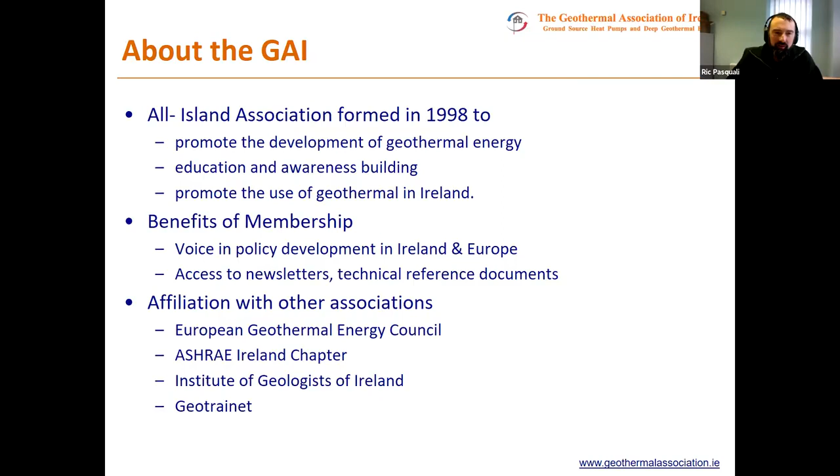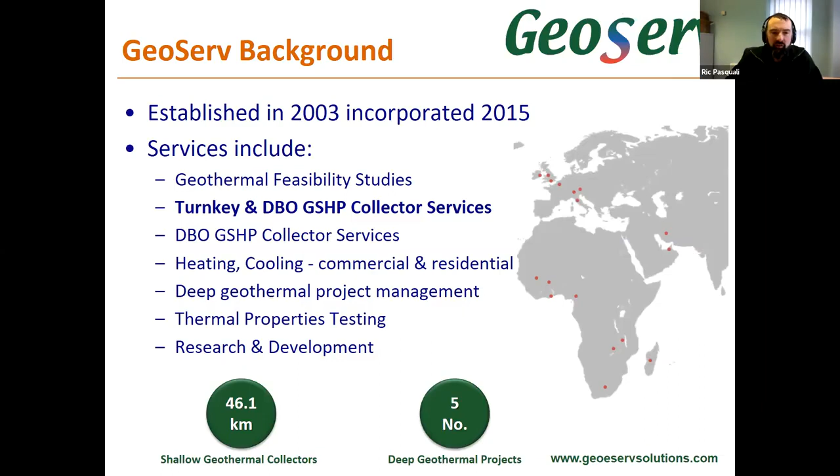A little bit about myself - my own business is GeoServ. We specialize in geothermal consultancy, particularly in offering turnkey design, build and operate solutions for geothermal collectors, for ground source heat pumps, and anything that's residential or commercial. If there's any type of system you see in the talk today that's of interest, please don't hesitate to get in touch.

So where is geothermal in Ireland at the moment? Our official recorded installed capacity that we know of in total is about 191 megawatts thermal, and it all comes from ground source heat pumps. As you've heard today, there's been historical exploration and research of geothermal resources dating back from the 1970s, but to date we have pretty much no direct utilization for heat, industrial process or power.

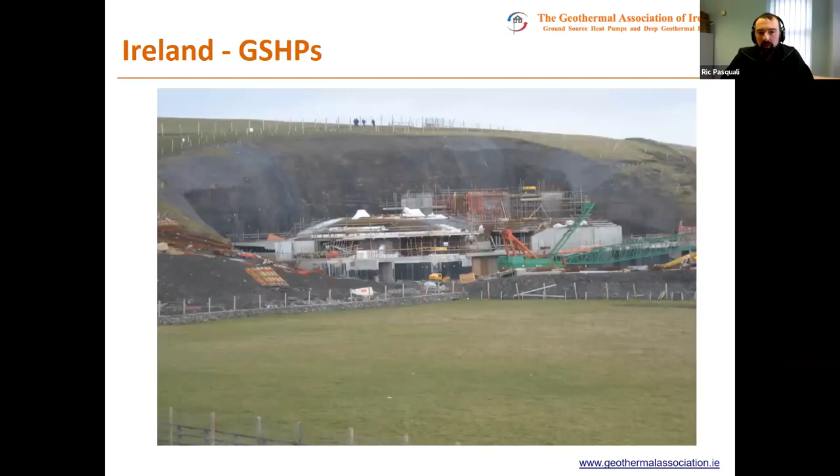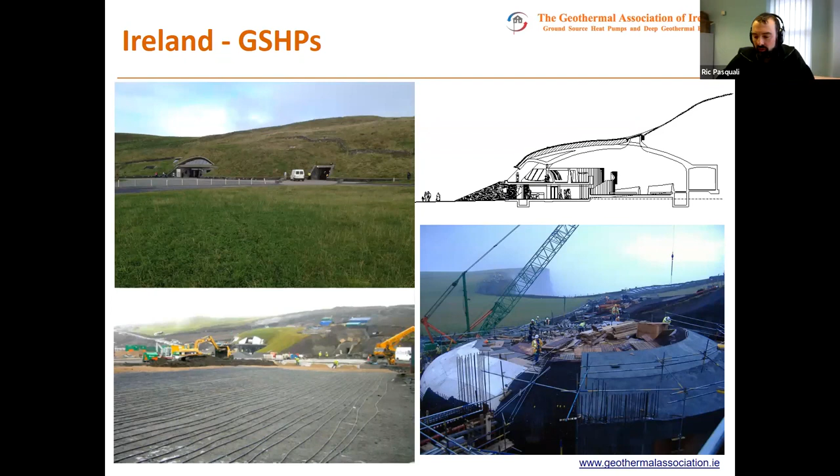So if you were to fly around Ireland looking for how we harness geothermal energy, these are the things you might see - large buildings newly constructed or under refurbishment, using very large scale horizontal collectors, as you see in the picture here. You might also look at other areas of the country where we might be using open loop boreholes, producing water from existing aquifers and gravels.

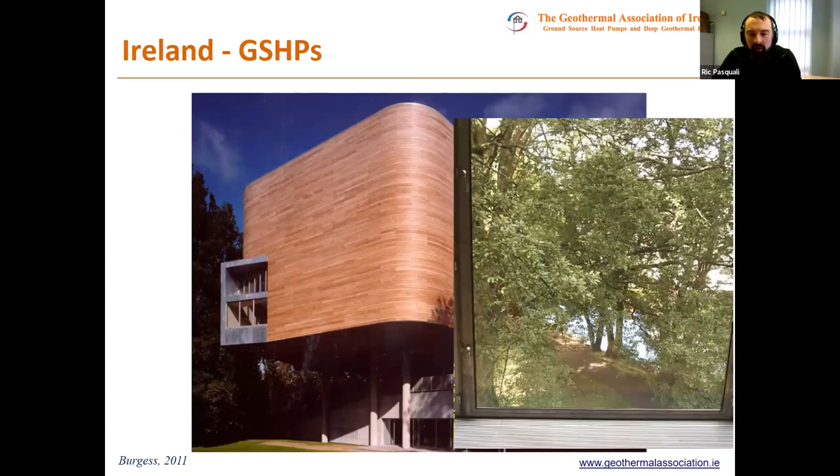This is the Glucksman Gallery in Cork, a building that has won quite a number of architectural awards. It basically uses groundwater from the gravels of the River Lee next door, where there are two boreholes just outside the building, providing simultaneous heating and cooling to a 200 kilowatt heat pump inside the building.

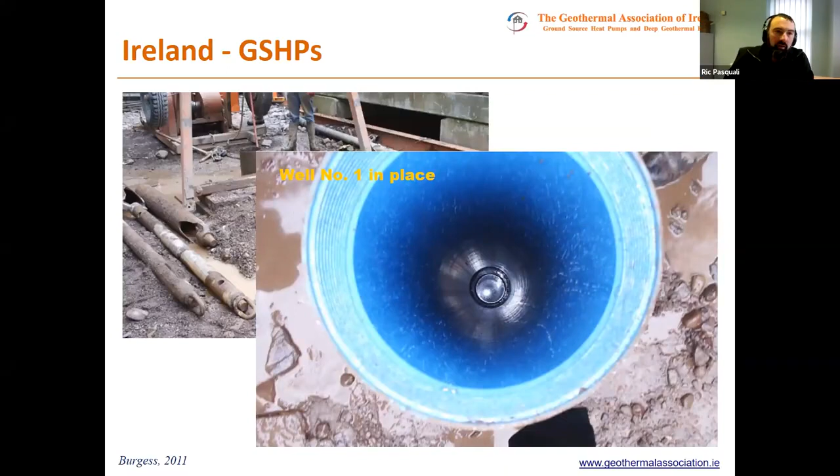So what I'd like to do now is move a little bit beyond where energy or ground source heat pump utilization might be in Ireland, and look a little bit around Europe to see where the current state of the art is, and what vision there could be for the island in terms of changing the way we see geothermal and maybe integrating it better into our building structure.

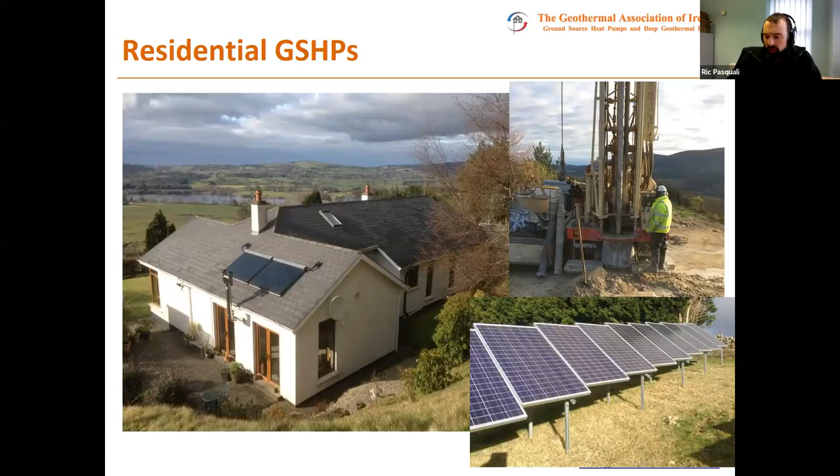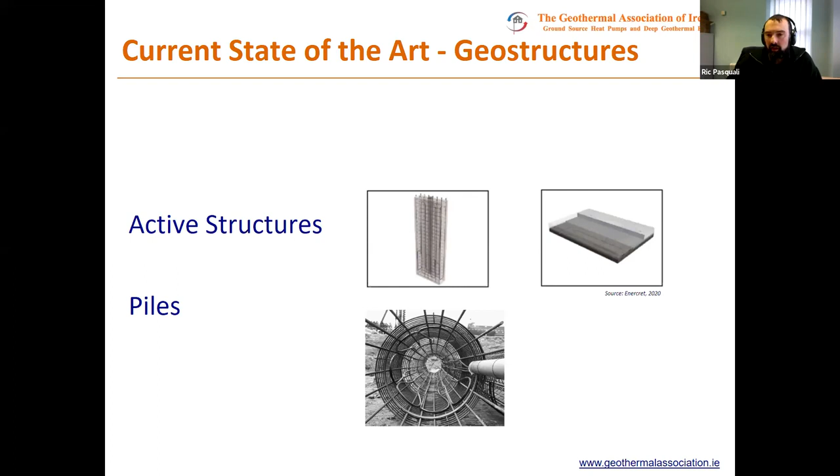An example of this comes from Austria, which was presented at the start of the week - this is the Marina Tower building in Vienna. They're basically apartments, the site is about 50 by 70 meters in size, and it's adjacent to the River Danube. The geothermal solution there has been to exploit the actual building itself and the construction of the building - these active slabs, installed in the bottom part of the building, actually provide 50% of the heating and cooling demand of that building.

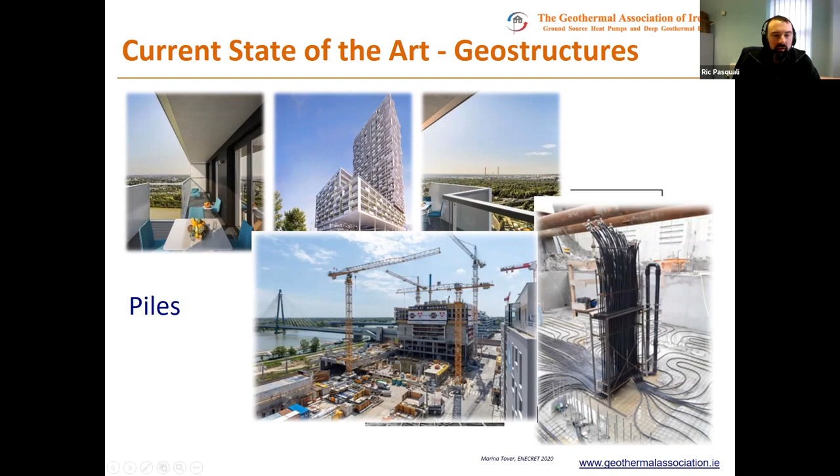So the building actually sits, the resting water level for this building is 10 meters above the location of the basement. So we're essentially in the aquifer, and we're just changing our thinking in terms of integrating it into buildings. So there are various other solutions for harnessing shallow geothermal resources.

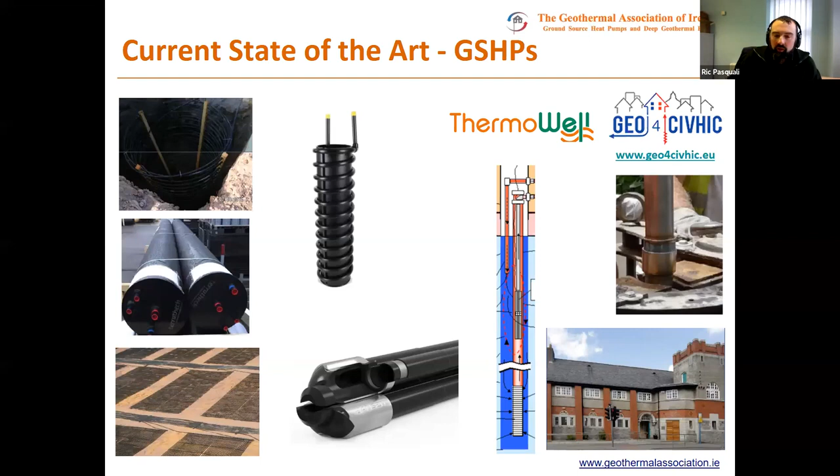You've seen some of them mentioned already by the previous speakers today. There are various solutions for horizontal collectors, such as baskets or capillary mats. There are now solutions for integrating harnessing of energy in sewage pipework or discharge pipeworks. There are different types of vertical collectors, standing column wells, or indeed higher heat transfer steel-based collectors combined with high temperature heat pumps for more difficult to retrofit buildings.

So these are all things that are there. If we move on to the concept of some of the things that were talked about by the previous speakers, you can see here, this is an example from Denmark, and the slides are courtesy of Termonet. This is the concept of shared arrays.

Rather than putting in complete district heating networks to actually circulate and share the heat, here the concept is to share the energy harnessing infrastructure in large housing estates, like you can see in the bottom picture, where there are a series of boreholes and individual homes have each individual heat pumps, or at a much larger city or town level, which is very much how these are being implemented in Denmark. So not in dense urban areas, but probably in more peripheral towns, where the infrastructure for harnessing the geothermal resource is shared. So again, low temperature networks.

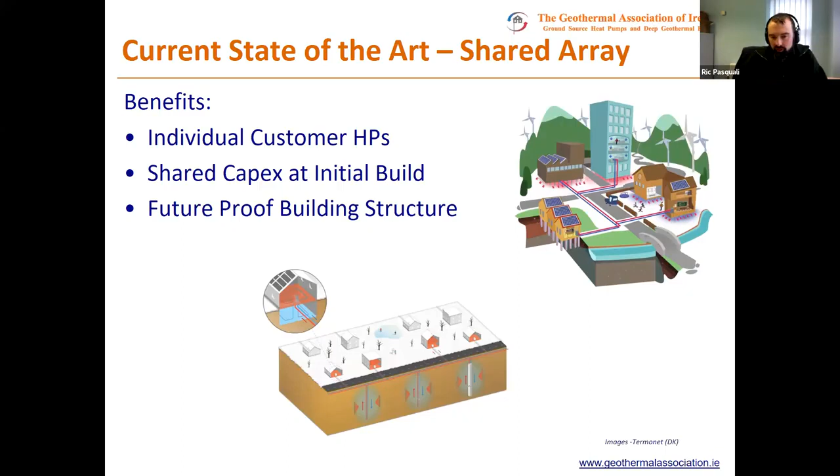You can look even further than that. This is really a slide, an image that I like quite a lot. This is the vision of Stadtwerke München, which is the German utility of Munich, of how they harness geothermal resources, and that's the plan they're trying to implement.

On the right-hand side of the picture, you can see a very new 6 geothermal doublets system that has been completed from the same drill pad in the city center of Munich. And these doublets provide about 100-degree water to a high temperature district heating network, which provides heat to the more difficult to retrofit buildings, areas where low temperature heating may be less possible.

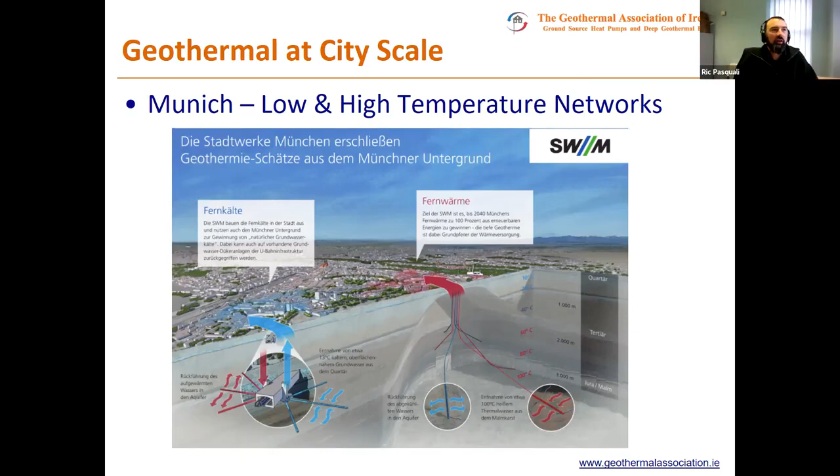But the city also recognizes the need for low temperature networks. So on the left-hand side of the picture, you see the schematic of their low temperature district heating network, and that uses existing aquifers, shallow aquifers, for heating and cooling.

So if we look at buildings, I think a lot of this has probably been covered already, but what are the pros and cons of geothermal? Well, really, there's quite a lot of pros if we compare them to other renewable technologies. First of all, geothermal can offer high efficiency heating and cooling from the same plant infrastructure, and that's really important. So we're not talking about providing one infrastructure for heating and a separate infrastructure for cooling. We can actually do it with both.

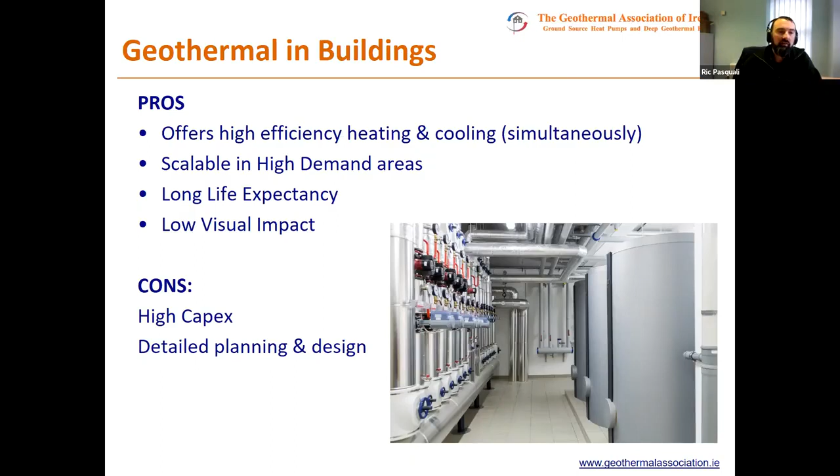They're highly scalable. These can be integrated to high temperature district heating networks or low temperature district heating networks, as we've heard. Typically, the infrastructure has a very long life expectancy, contrary to other heating and cooling renewable technologies. Some of the cons, obviously, it's much higher capital intensive, and it requires detailed planning and design.

So during the course of this year, we've been trying at GAI to look at where might be the low-hanging fruits, and where would geothermal on the island best fit. We've looked at a number of possibilities and opportunities, and we believe, I'm saying this for Northern Ireland, but in reality this is really the strategy we see for the entire island. So we see the low-hanging fruit for us is the retrofitting of commercial and public buildings first, the larger schemes.

There are obviously possibilities with residential systems, and maybe I'll cover those a little bit later. But if we focus on commercial and public buildings first, where heating and cooling loads are generally present, as retrofit tends to look at NZEB standards and developing much higher levels of efficiency, we actually see in the building stock and in the retrofitted building stock that there are cooling loads now that perhaps did not exist beforehand. And then in terms of district heating, we certainly see a potential for deep geothermal, aquifer thermal energy storage, and borehole thermal energy storage.

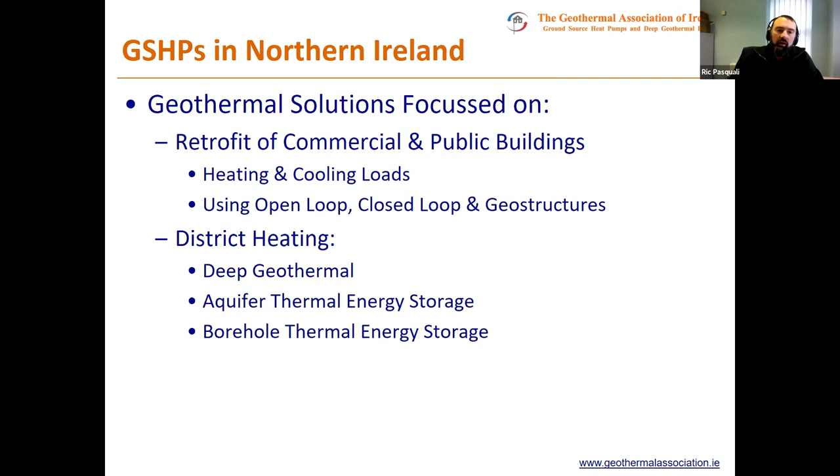So what we're saying is we'd like to try and be realistic, and we'd like to say, well, if we look at the next 10 years, where would geothermal fit best? So we're saying we'll focus on commercial, public sector and tertiary buildings first. We'll focus on baseload heating and cooling options, and we look particularly in the context of deep retrofit and displacement of oil-fired central heating, integrating geothermal with other renewables.

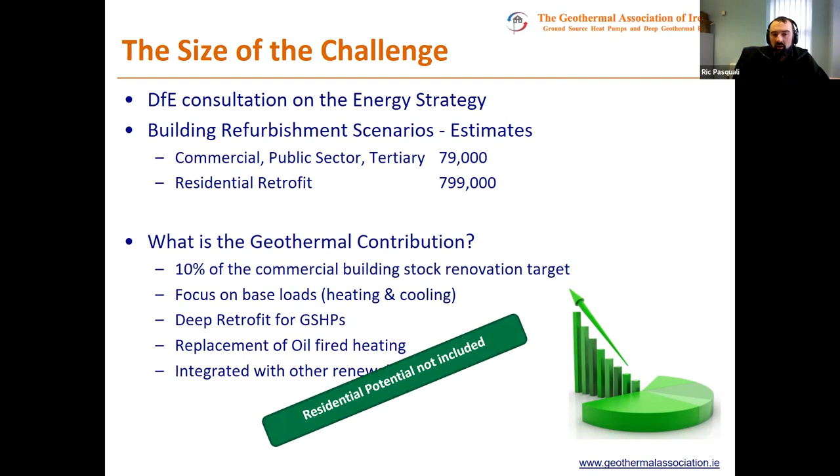So if we look at that and we consider taking that 10% chunk of buildings that are refurbished every year, for the moment we're not considering residential potential, but there is more there. This is what a picture to 2030 would look like. So you see on the left-hand side of the scale, this is the average growth rate of ground source heat pumps at the moment on the island, about 3.8% per annum.

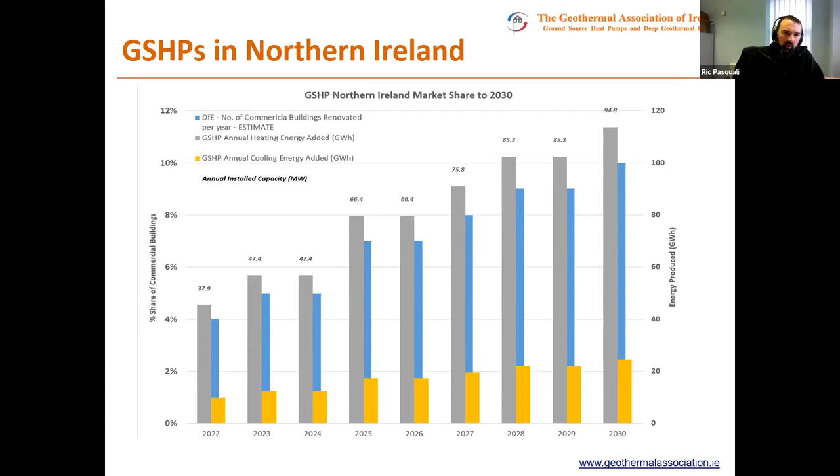So what we're saying is that starting in 2021, 2022, we'll be moving to 4%, and we'll be increasing that growth rate all the way up to 10%. And if we then look at the building stock that there is, we consider that there are deep retrofits. So a lot of these buildings will try to achieve probably only 1,200 hours of heating or 1,400 hours of total heating demand. They may have a small cooling load, maybe something like 260 or 280 full working hours of cooling per annum. This is the typical spread that you would see from commercial buildings only. So these are figures for the all-island market as we see it, including north and south.

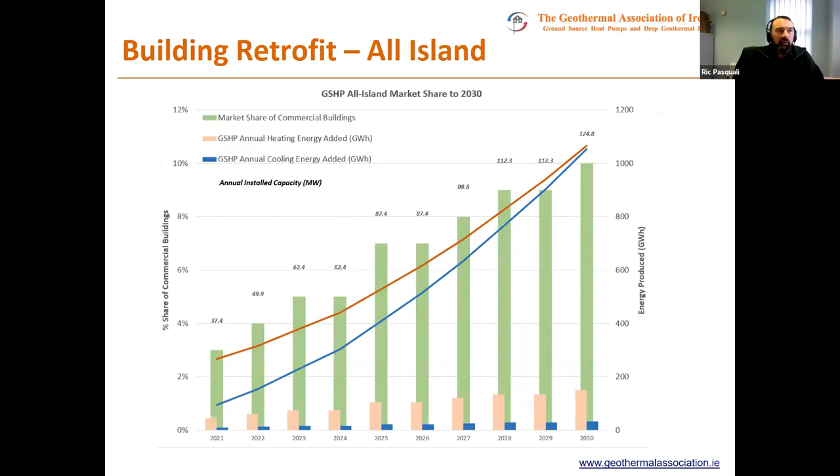I probably don't have the time to cover this at the moment, but I'd be glad to talk about it to anyone afterwards. So what's the potential for deep geothermal? I'd like to stress first of all that the table in the slide here only covers heat. So we see the vision is definitely in the context of district heating in high heat demand areas with a high preference, industrial applications like have been covered earlier on, and then there is some potential probably for power generation, but at the moment we need to better understand where this would be and how it would be implemented.

So if we look at heat alone, and we take into consideration that the development timeline of deep geothermal projects tends to be quite long, we might see a number of plants in operation, as you can see here, over to 2030. This might be the structure. So we're saying let's be conservative, let's assume that we have an installed capacity of about 5 megawatts for each one of these plants. And we would end up with probably about 20 megawatts or so spread out across the island by 2030.

So this could still be conservative. We could accelerate this much more, and we could have these plants under investigation much more developed in the course of the next 10 years if we get the right policy framework.

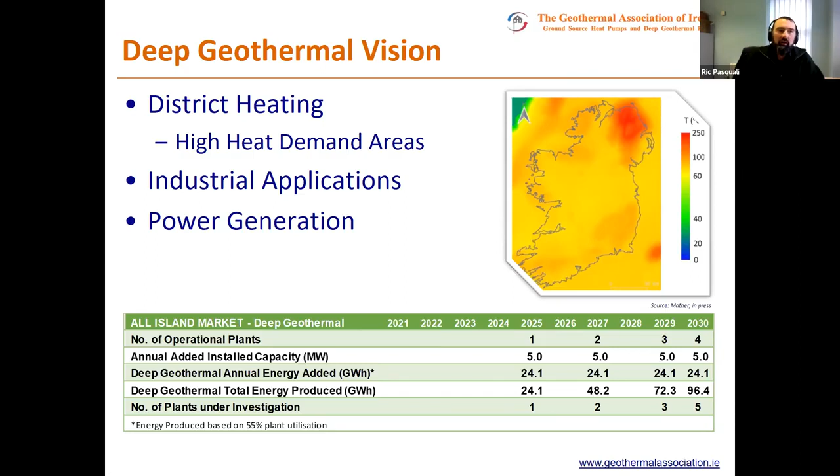So for my last slide, what's needed to support it? Well, I think we've heard a lot about that already, certainly in the first session this morning, and probably to some more extent earlier in this session today. But I think one of the key things that's critical, apart from increasing the resource awareness and the public perception that comes around geothermal, we also need a more careful mapping of energy demand and resource matching. So I think the piece of energy demand and resource data for Northern Ireland really needs to be further highlighted.

An integral part of this policy making and support is the development of system related data - measurement, monitoring and verification. And for us, this is critical. It's about being able to understand where systems are located, how they might be able to interact, and about better informing planning decisions and energy planning in the future.

There are a few other items that I've included there, but one of my favorites is the fourth item, which is integrated design. And when I say integrated design, this has to come from a local area level in terms of how one wants to develop energy solutions in a local community, all the way down to looking at the building fabric and integrating renewable technologies and geothermal with the building fabric and the retrofit. So not applying this current model, which we still see a lot of, where there's a proposal made for a building, for a refurbishment of a building, and then there's just a bunch of other technologies or renewables glued onto it to achieve a certain maybe BREEAM standard or a certain DER rating.

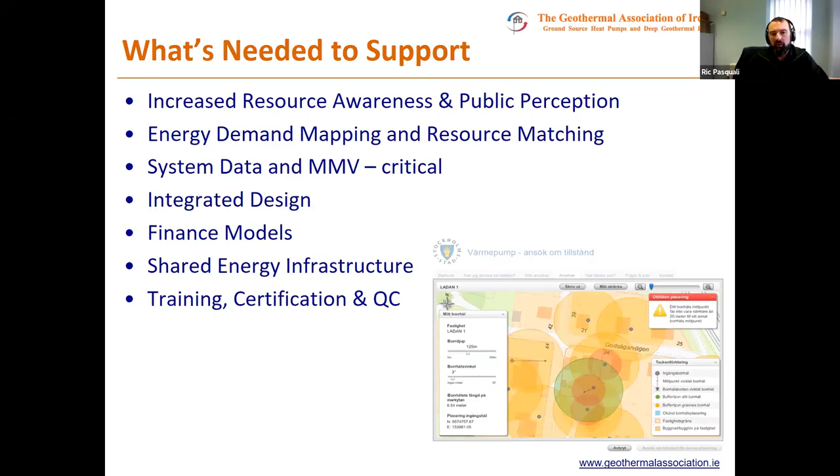So really we need to look at a much broader approach. So I think I'll leave it at that. Thank you very much.